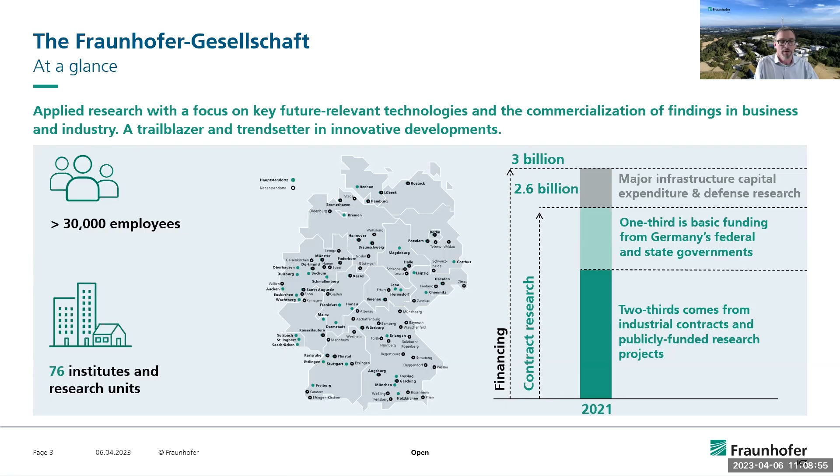As I said, focused on industry, we target lead markets, which also are identified together with our government. Those are plant, mechanical, and vehicle engineering, healthcare sectors, digital economy, construction industry, mobility sector, chemical industry, energy sector, food industry, and aerospace industry. And as well, what you can see here, the bluish or greenish dyed fields are the lead markets where we either contribute or we have the lead. So Fraunhofer ICT is leading the lead market, Fraunhofer Alliance for Chemical Industry.

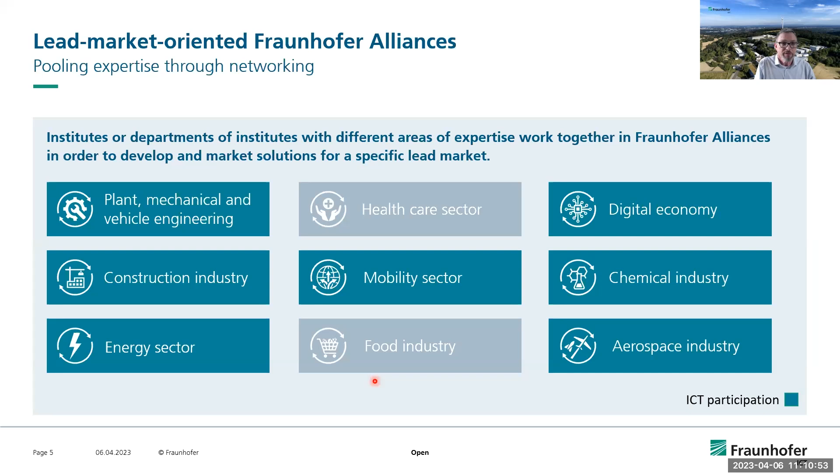Now, when we look into our institute, we have 4 core competences. One is chemical processes, non-fossil chemistry, electrochemistry, chemistry with hazard potential, etc. Polymer engineering, and within the group of polymer engineering, there's also the group for lightweight design and composite engineering. Then we have the energy and drivetrain system. And then we have a defense sector, which is also in explosives, safety and security. It also has to do a lot with filled and reinforced polymers, just with an energetic background and not a structural background. So these 4 core competences are being served with about 550 people, which are located at our institute.

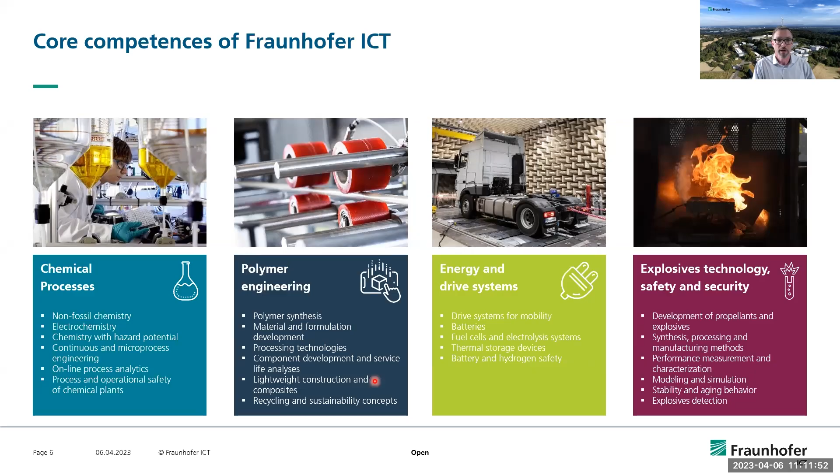And you see it's a pretty interdisciplinary approach where a lot of synergies can be derived. And a few I want to introduce in the beginning so that you can get a good imagination of who we are and what we are doing. Now, polymer engineering, I just picked 2 departments out of that family of departments that are fueling these core competencies, which are of relevance for today's presentation.

One is the Department of Polymer Engineering, where we look into material development and compounding, not from the perspective of synthesis, but from the perspective of modification, physical modification, filling, reinforcing, foaming technologies, a big subject at our institute, additive manufacturing, injection molding and compression molding, structural lightweighting, where I will talk a little bit more in depth today about wet compression molding, microwave and plasma technology, and obviously we have to get our material data cards filled. We do a lot of material characterization, and also when we do part development, failure analysis, etc.

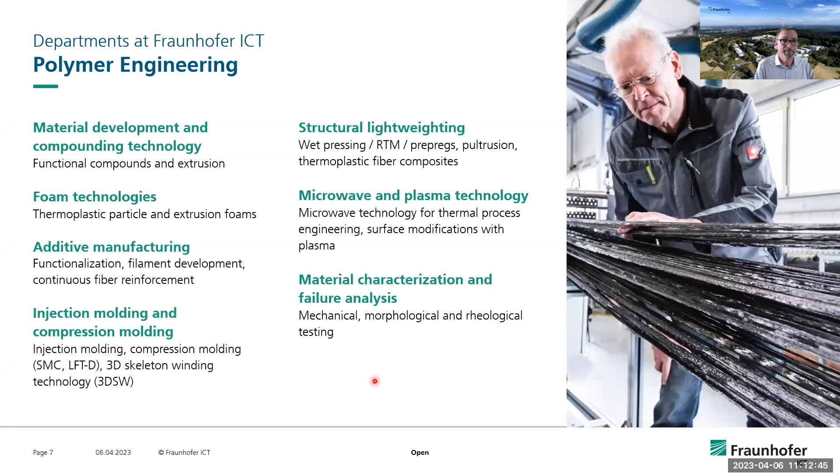A topic which I want to mention because we use it more and more in our projects is environmental aspects. Evaluation on sustainability and circularity assessment, but also recycling technologies, bio-based materials, bioeconomy, and subjects like environmental simulation and product qualification for our industrial partners once we develop prototypes, so that they can undergo artificial aging processes and exposure to environmental threats to qualify the product.

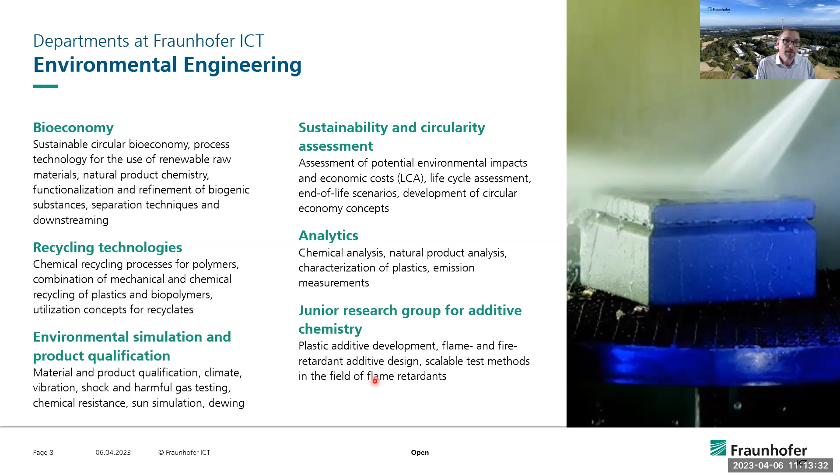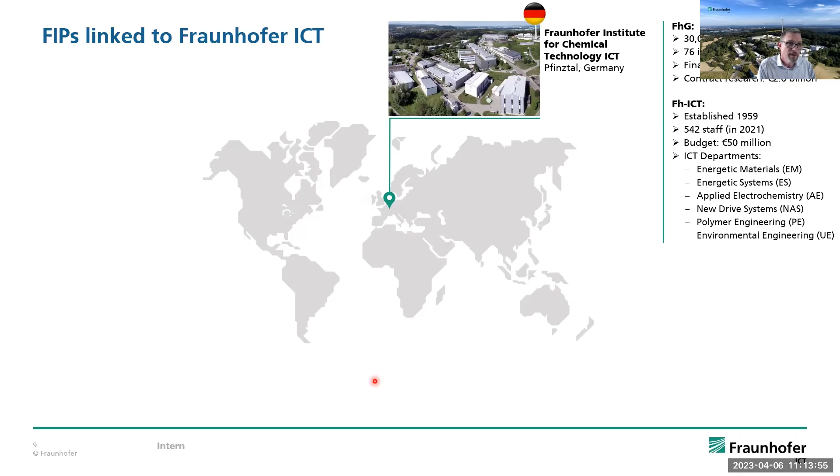Our institute, as I said, is one out of the 76 in Germany, and we are truly international. As mentioned in the introduction, I had the pleasure, together with my colleagues Andy Hrymak from Western Ontario in Canada and Youngbin Park from UNIST in Ulsan City, Korea, to collaborate in the field of composites with our competences and our main location here in Germany, having these 2, I would say, innovation platforms that have been established. Canada is the oldest one, with more than 10 years active now in the field of composite research, and UNIST more than 6 years now being active in the field of composite manufacturing.

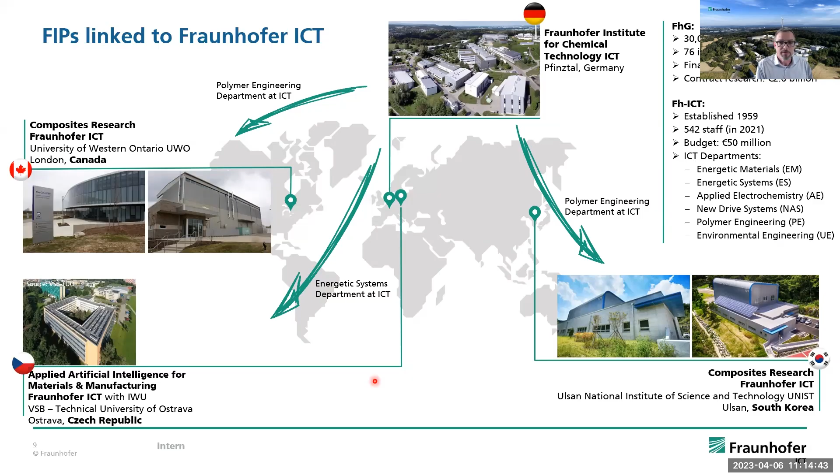And a pretty new one that we opened together with our partners in the Czech Republic, with a focus on applied artificial intelligence for materials and manufacturing, with the University of Ostrava in the Czech Republic. I mean, lightweighting and composites are already a contribution to sustainability. But especially at our institute, you see it in my background, you see the windmill sticking out here. I want to introduce a few highlights that we looked at.

So a quick introduction to this exception that we have here, having our own power plant. We are running not just a power plant, we also have energy storage devices, as you can see here. And energy storage devices are becoming increasingly important as a result of the German energy transition. They can compensate for natural fluctuations in solar and wind energy and thus convert the renewable energy source into a predictable generating station with uninterrupted supply. They can also make a decisive contribution to grid stability and frequency control and reduce the need to extend the grid.

In the framework of the projects that we are running, one is the Redox Wind project. A large-scale redox flow battery storage device has been developed, as you can see here on the right side of that slide, and connected directly to the intermediate DC circuit of that wind turbine here. And this unit, consisting of a generator and a battery storage device, has been constructed as a pilot unit at our institute in Pfinztal.

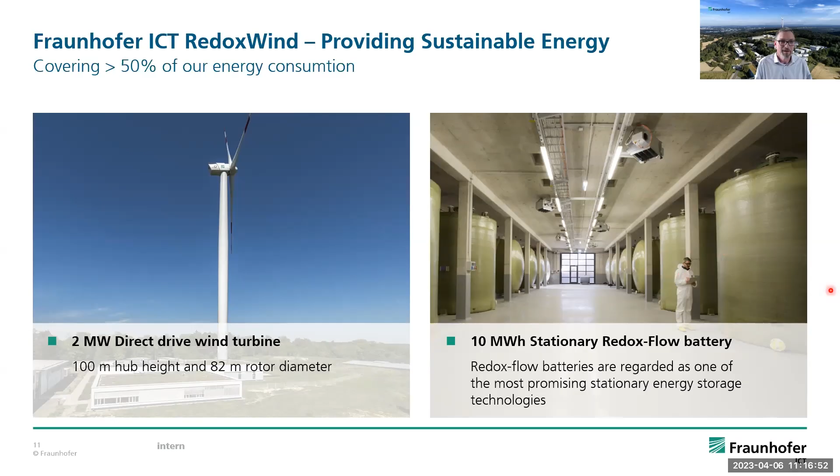We add this year 800 kilowatts of solar energy so that we are getting more and more independent of external energy supply, and basically are moving toward a CO2-neutral energy supply. And by the way, quite a bit of composites are already used in the wind turbine, and also, as you can see, in the battery storages.

From there, going to efficient, weight-efficient powertrain applications for sustainable mobility. 3 examples that I want to show to you based on projects that have been done in the past. One is a lightweight battery module, the conception and development of a lightweight traction battery system which, using innovative design methods and processes, serves as a prototype for the e-mobility of the future, with a direct tab cooling of the pouch battery cells, a high-performance thermal management system designed to allow for high charging and discharging rates without derating.

Or a lightweight traction motor. That was a really nice project. It's a motor which is directly cooled by a composite housing. It guides the water directly to the copper heat emitters, if you like. So the selected cooling concept significantly increased the continuous power density of the motor compared to the state of the art. So it's not just lightweighting, it's also functional integration or boosting of the power generated.

Then even for the combustion engine, here you see the aim of a funded project called LIMOD, where we focus on the development of a future internal combustion engine with significantly reduced mass, improved operation efficiency, thermal management, and reduced noise levels. That's obtained by combining additive manufacturing methods and large-size, lightweight, structural, and functionally integrated composite side covers. The engine concept is optimized for the combustion of non-fossil fuels, such as green hydrogen.

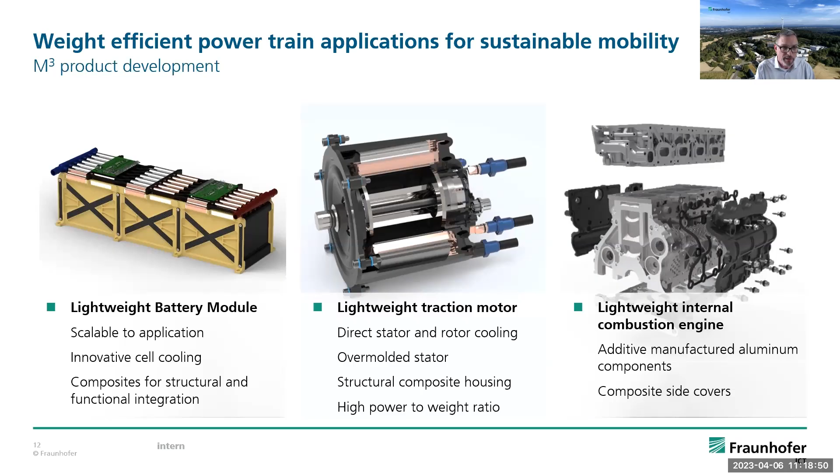Now coming to our main mission, lightweighting, reducing weight in a holistic way. So we spent quite a bit of thought on what is the definition of lightweighting. And as you can see, it's complex because it's not 2 words, it's quite a sentence. And it shows already the aspects that have to be considered if one wants to be successful. So lightweight design is a holistic implementation of a development strategy aiming at realizing the required function under given technical, economical, ecological, and social constraints through a system of minimum mass.

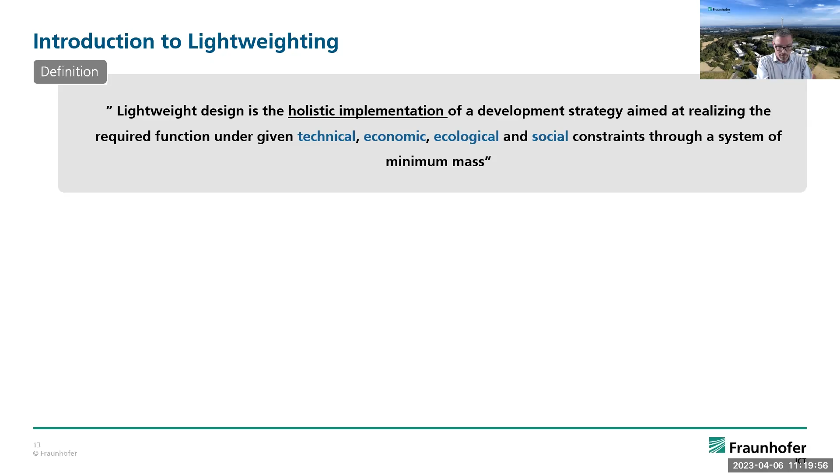We often, as engineers, dive right into the technological challenge, and that's our mission as scientists. And then the industry knocks on our shoulder and says, well, there are economic boundary conditions, and the range is being reduced significantly. And now we have societal, political constraints, mainly driven by ecological and also social constraints, that are influencing the toolset in the playground where we can develop our solution.

Therefore, we do need interdisciplinary approaches if we want to succeed. We have to develop a kind of system thinking and understanding before we select materials and processes. We have to understand the materials and processes that we are selecting. We have to learn how to predict them, and we have to learn how to manufacture and predict manufacturing in order to use the materials in an efficient way. Not just because of weight reduction, but also because of cost reduction and ecological impact reduction. And that embedded in a social and environmental boundary condition.

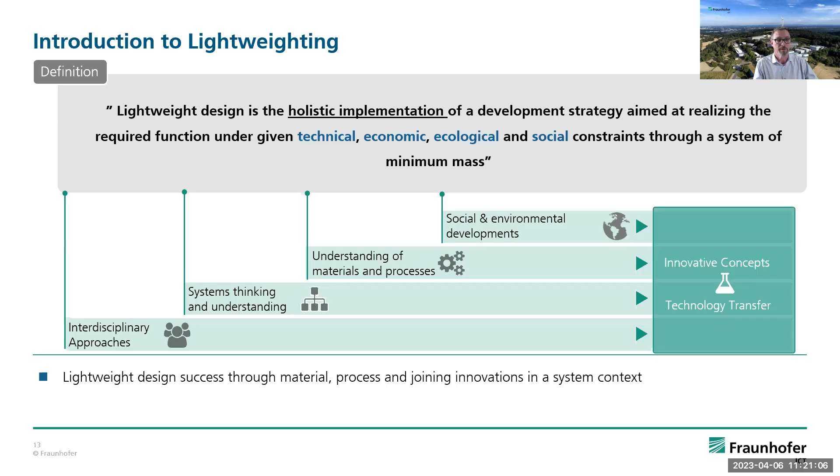That's our fertile ground where we have our M to the power of 3 approach embedded. Lightweight design success is always through the material, the manufacturing process, but also the joining innovations, because every system has different boundary conditions, as I said, and a lightweighting solution which is economically successful looks different in aerospace than in automotive. And we also have to think, how can we work collaboratively with other materials in order to get to a system solution, which can end up in a hybrid solution as well.

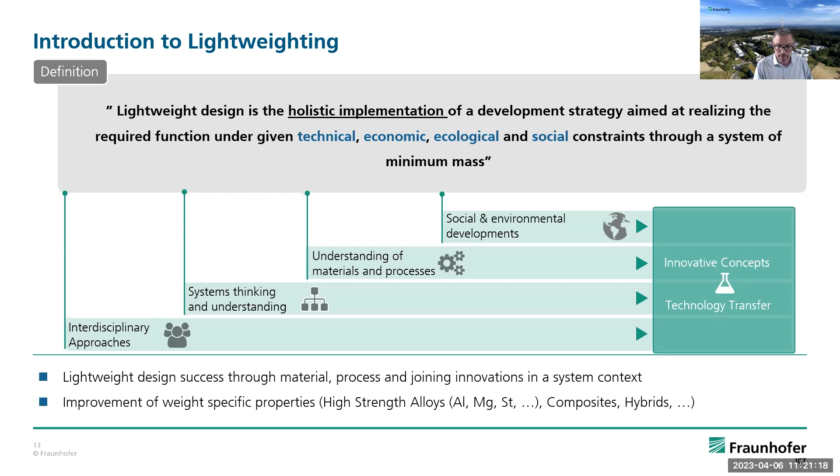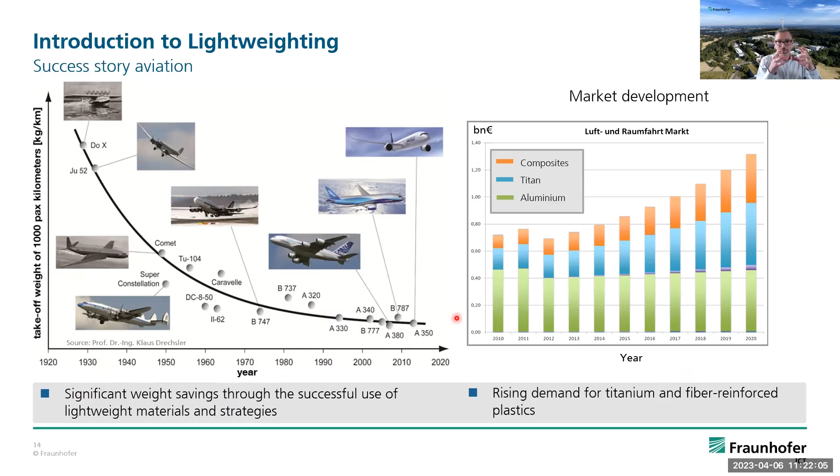When we look into different markets, we can name a huge success story in the aviation sector. What you see here is 100 years of aviation with different, very familiar airplanes, and the takeoff weight reduction that has been achieved over the past 100 years, by the selection of the most wonderful materials you can imagine, most expensive as well, but there's a business case for it which is different from that of automotive. So we cannot copy these solutions to automotive and think that we can be successful as well. We have to have this holistic understanding, which I want to talk about today in a bit more detail.

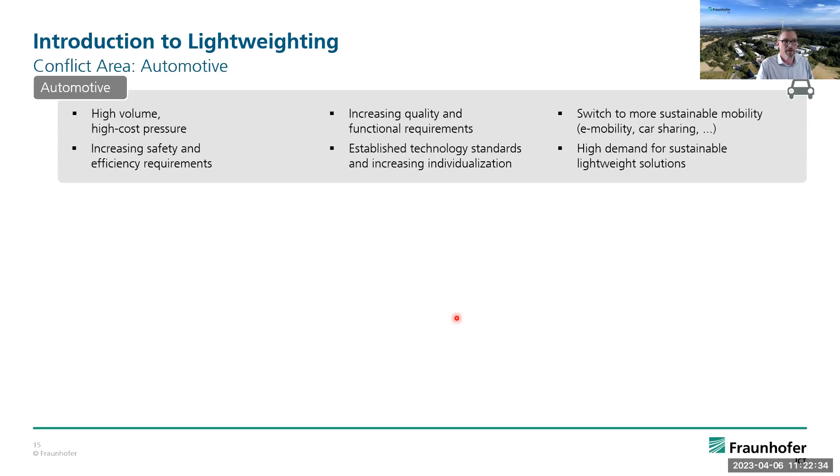When we change the scope and look into automotive, vehicle design is subject to a different field of tension. As I said, the business case is different. The vehicle is most of the time in the parking lot, whereas the airplane is most of the time in the air, earning money with the weight saving, right? We have high volume, high cost pressure, increased safety and efficiency requirements, increasing quality and functional requirements. We have more individualization boundary conditions, and we have to switch over to sustainable mobility. So we are in a transition right now.

And all of a sudden, with new drivetrains and new vehicle concepts, new materials can come into play in areas where they couldn't, because we don't have a combustion engine anymore. But we have a very heavy battery to carry. So from the regular combustion, that's the curve in automotive. It's not declining at all. It's still inclining. We could flatten the incline and be more efficient by innovative materials and material combinations, but we added more and more safety features, comfort, and functions to the vehicle, and all of a sudden, the big jump with the batteries that we have to accommodate. So yes, lightweighting plays a continuous role in automotive in order to be efficient, because the volume of automotive is much higher than that of airplanes.

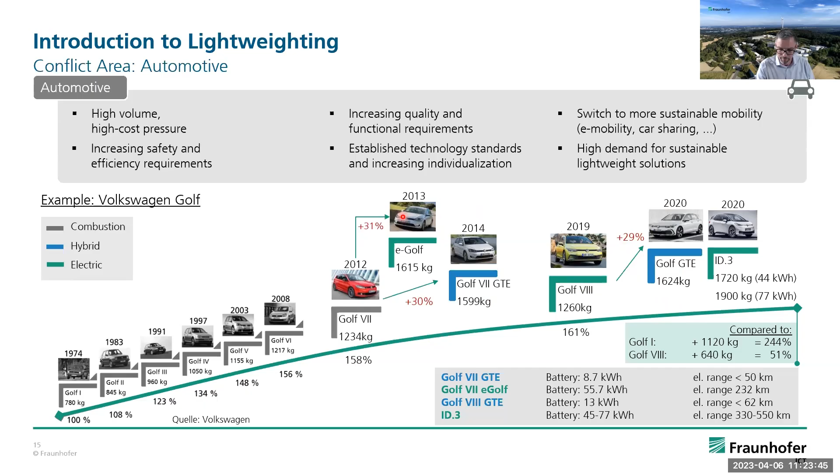Now, since we can't go with the same approach, we have to think about so many boundary conditions in terms of platform strategies, large volume production, etc. In most cases, it's a smart solution to come up with a multi-material design. So how do I bring the right material to the right place, so to say? In theory, wonderful. In reality, challenging, because we have higher complexity, we have the delta alpha challenge, as we call it, the different thermal expansion of the different materials. We have to join them. We have to maintain that marriage until the end of the product life. We have to ensure repair, maintenance, etc. And we have to make sure that we separate these different materials after their lifetime in order to be recycled appropriately.

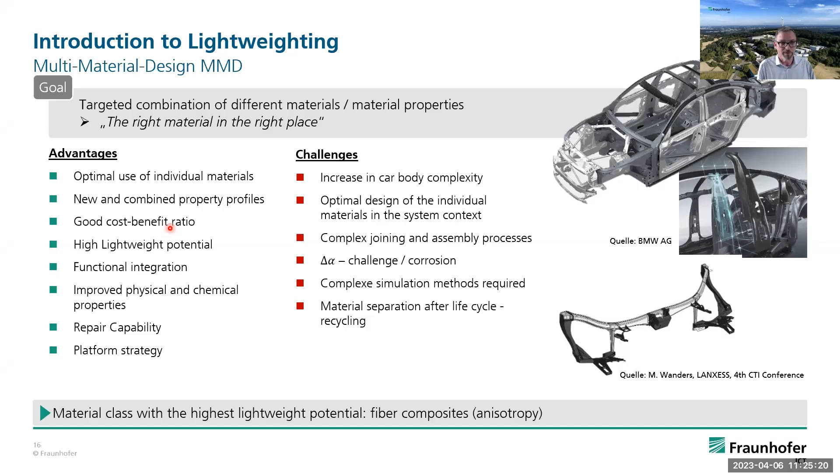But on the other side, we have a couple of advantages we want to take advantage of. Like you see here, I don't want to read those individually to you, but finding the sweet spot is always a challenge, requires the toolkit I'm talking about, and requires a common interdisciplinary approach. The material class with the highest potential for lightweighting, as we discussed prior to this talk today, is fiber composites, because they are still the youngest group, and they have an additional benefit, the anisotropy, because they can be designed already on the material level, and not just in the part design.

When we look into the efficiency of lightweighting, and that's a vehicle life cycle, you see that in the vehicle life cycle, 85% of the CO2 emissions are being generated during the use phase. So yes, it's worth spending a lot of effort on lightweighting and employing new materials. Just 0.1 is in

recycling. But in order to improve this ecological footprint, we have to take that out of the equation and then just look at material production, raw material supply, vehicle production, recycling. How can we decrease the gap when we do a life cycle analysis versus a circularity analysis, and see what we gain back after life cycle and what gap is still left, and how can we minimize that by employing appropriate materials, and also materials maybe in future that are more based on natural sources.

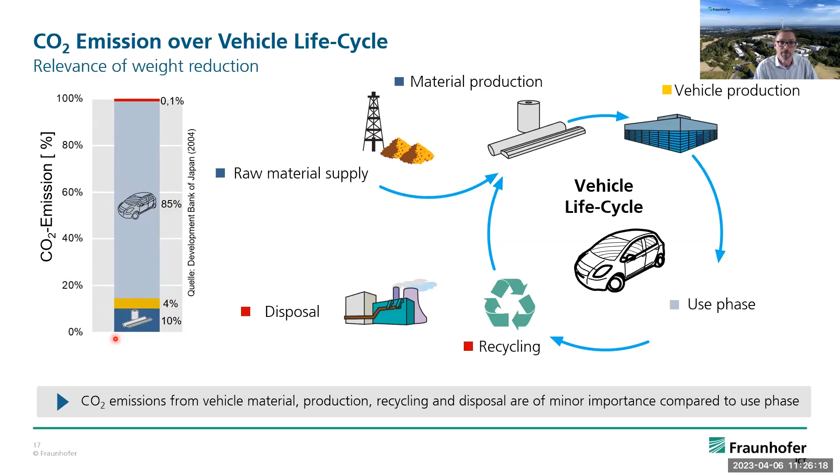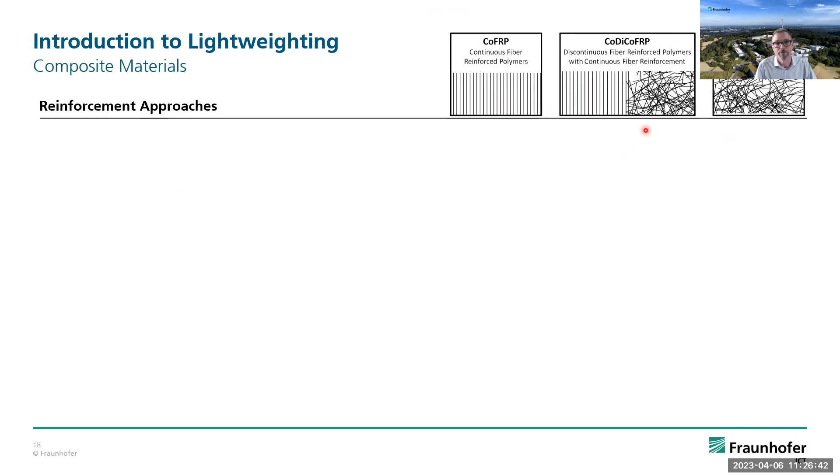Now, quickly, how do we distinguish the world in composites at our place? We talk about continuous and discontinuous fibers. That's our abbreviation here, CoFRP and DiCoFRP. And then we have the nice combination of both. So that's a co-molding of discontinuous fiber reinforced polymers to continuous. I apologize for the complexity of the slide, but that summarizes basically our world of thinking here.

What you see here is the continuous fibers. Here's the discontinuous fibers. These are structural applications. These are more functional lightweighting, totally different performance here, and also completely different process technologies because it's a flowable material. The completely different material behavior can be processed differently in much larger numbers, much more complex compared to the continuous fiber reinforced materials. So it obviously makes sense to think also about the combination of both in an efficient way, where we have the best of both worlds, somehow combining structural performance and functional integration.

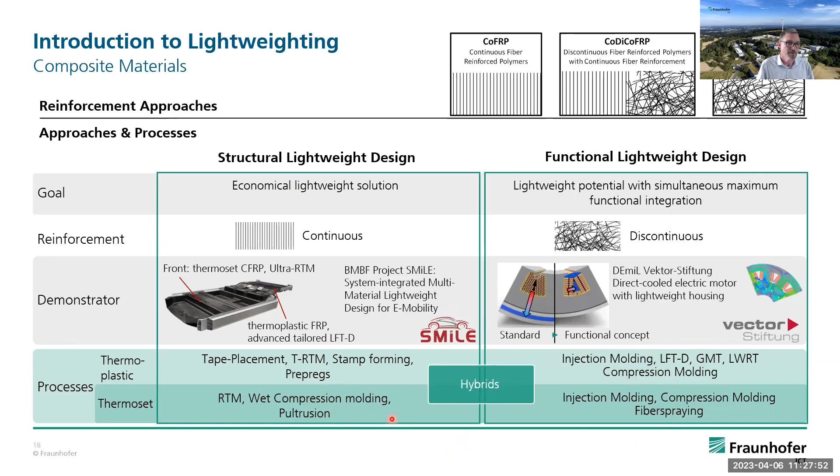The greenish fields distinguish between thermoplastics and thermosets, and what you see here, and that's a summary basically of what we offer in our area, is medium to large scale automated technologies for composite manufacturing, with a focus on medium to large scale, as I mentioned. So that's our technology portfolio. Talking about the approach now.

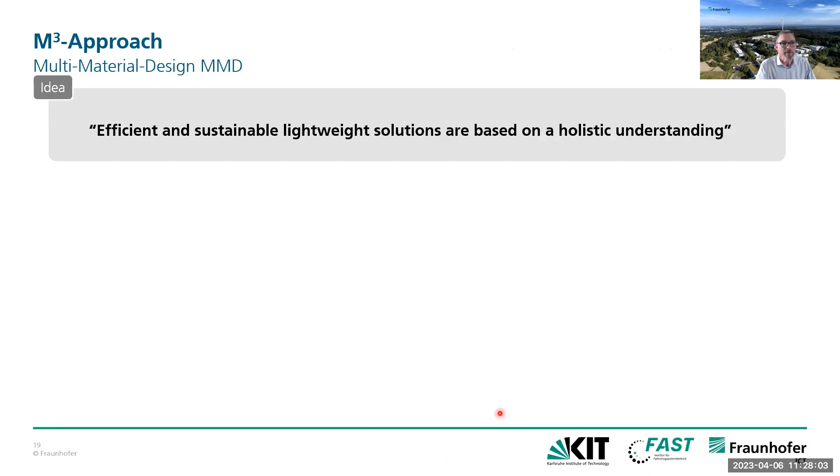And obviously in automotive, we cannot do quality assurance part by part. We have to quality assure the process. All of a sudden, the process gets expensive because it's automated. But it's negligible in terms of the number of parts you will produce with this technology, compared to aerospace, where you have to consider manufacturing technology costs much more intensively because it can't be amortized the same way. So you see, I'm just highlighting some of these constraints that we have to think about before we start selecting an appropriate material for an appropriate market and an appropriate application.

And then we look into how many parts, what are the suitable manufacturing technologies, what materials can come into play. Here in automotive, more the commodity materials; in aerospace, more the high performance materials. And how can we produce efficiently, and how can we secure that with the understanding of the materials, simulation methods, predicting the manufacturability and the manufacturing influence on the material, whether that material is suitable in that shape to fulfill that function. And then we get to a lightweight solution which is economically, ecologically, and technically feasible and socially accepted.

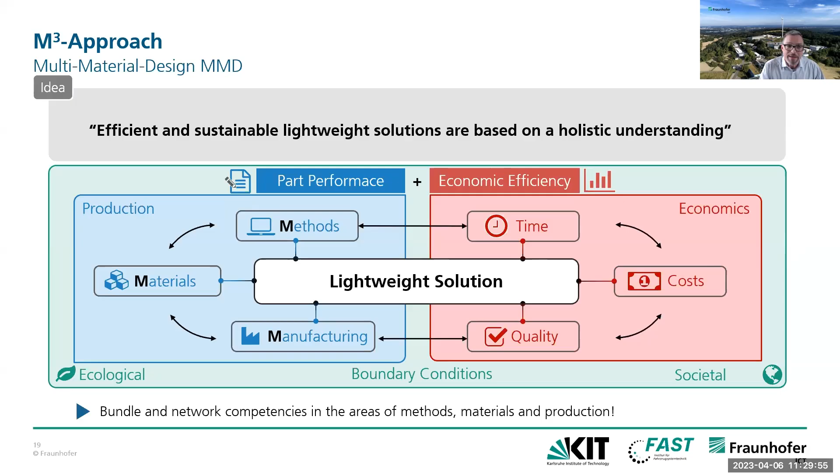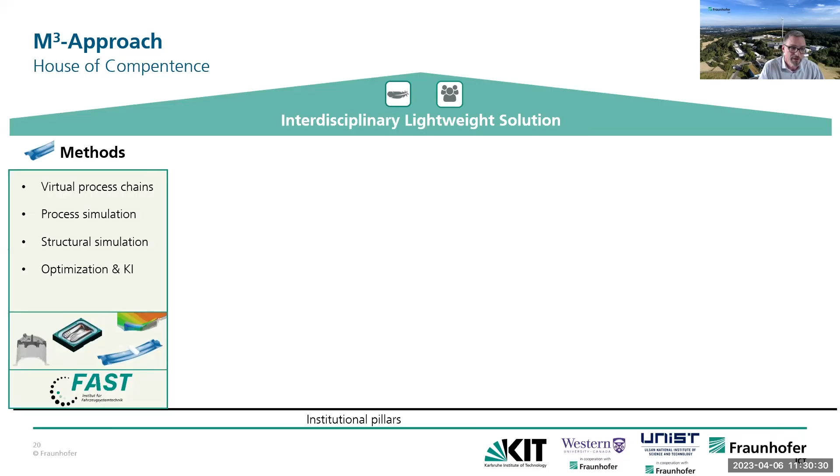We can't do that as one institute. We have our partners. So we formed a house of competence in Karlsruhe, where the superset goal of the interdisciplinary lightweight solution is being supported by the development of methods, development of virtual process chains for different types of materials, for different process technologies, process simulation, structural simulation, and then also optimization of products and design and artificial intelligence supported manufacturing.

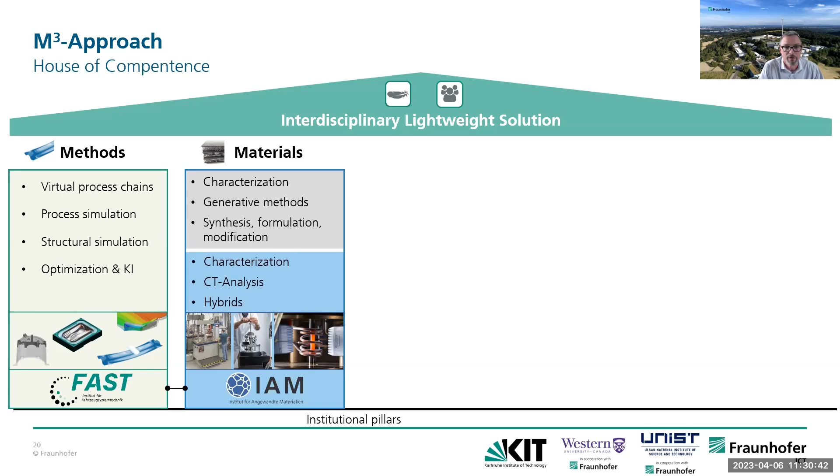Then we have the materials, where we need to fill our material data cards, where we do the characterization, the understanding of the morphologies influenced by the processing as well, and translate that into suitable manufacturing technologies, or consider that at least when we select suitable processing technologies. And then basically through our partners, we do projects at the different innovation platforms or with our spin-off companies that are also part of the transfer.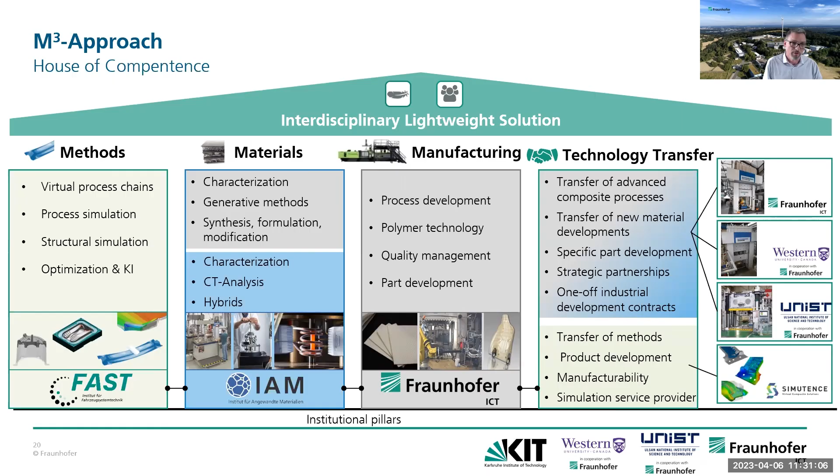Talking about the M³ approach, methods, material, and manufacturing, I brought an example of a past project that we conducted a couple of years ago already, the so-called SMILE project, where the major focus is the development of concepts and design for an innovative mixed material body for an electric vehicle that was without steel, so that we don't have electrophoretic painting, which is an advantage because we don't have the painting process and therefore don't have to use the high performance resins that we have to use when we have to undergo this.

The development of a virtual process chain for component and total cost optimization, the validation of the structural integrity and the crash requirements at component level. We are focusing on two parts. One is the floor, thermoset with ultra resin transfer molding. It's a pressure controlled process, and the other one is thermoplastic tapes overmolded by LFT. That's a rear body structure that's more the crash element, the energy uptaking, and the passenger cell more stiff. Stiffness optimized is a thermoset.

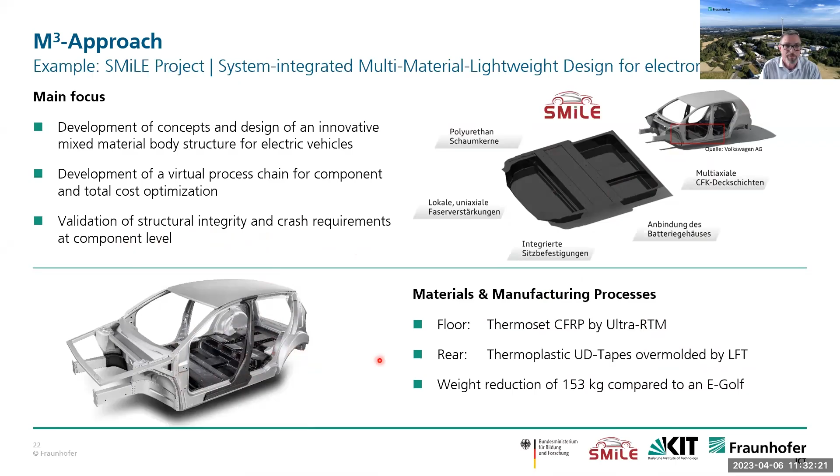So the advantages through a holistic approach and a continuous CAE chain is to consider manufacturing effects and their influence on structural behavior, to verify the manufacturability, and to have iterative optimization at the simulation level without having a lot of testing and molds development, because these kind of molds are expensive. So we want to have a virtual design and optimization of a product and a process up front, which accelerates the part development and results in reduced design loops.

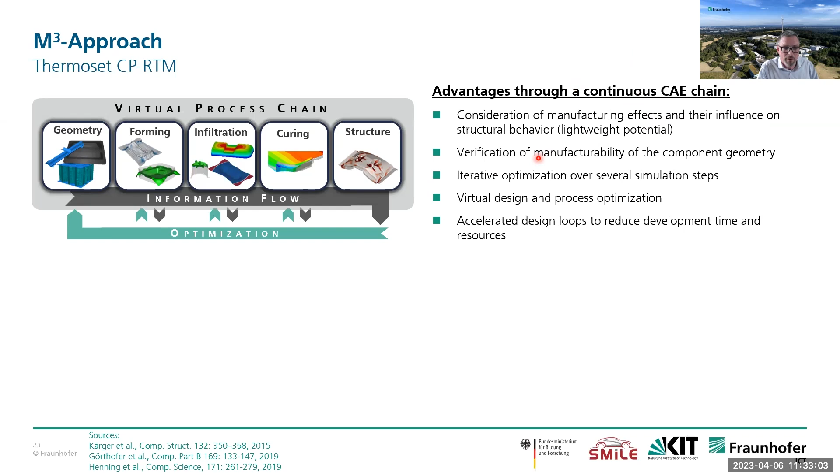Now, having just a focus please on the second part, that's the mold filling displayed in this video. In order to get there, we have to understand all these different steps, the forming prediction, the local fiber content, and also fiber orientation, permeability changes, and then the resin that's tested here. That's why I say material, method, and production. We need to validate that so that we can use that for further part development afterwards. You see here a couple of publications below.

A lot of this work is coordinated and done by my colleague Professor Kärger, who together with me is running the research institute at FAST for lightweighting. And we are also working with our material characterization folks. You see this plate rheometer is a special development because these highly reactive resins have to be mixed and injected immediately, because when you do it in a conventional way, it's already cured before you start measuring. So we have to adapt methods to get real data for what's happening in the process during the manufacturing, which is a couple of seconds only.

And then when we have the mold filling, which is pretty accurate, we have different wall thickness, we have sandwich structures in between. Then we do the cure simulation, and from the curing we derive stresses and also warpage that help us to control part tolerances.

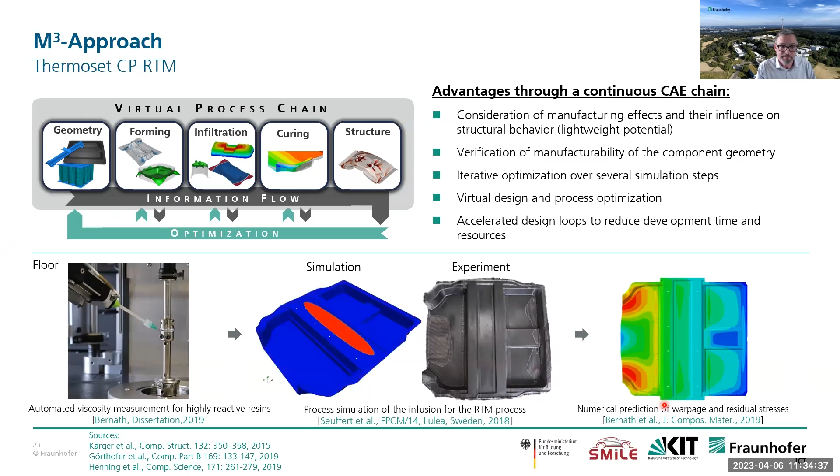Now the back structure you see here is a tape placement, or organo sheet if you like, thermoplastic, hot, then molded, as you can see here, with a segmented mold. So it's like ironing a textile from the top to the bottom, from the inside to the outside, in order to avoid wrinkles. So by the simulation, we can predict which area has to be draped first and which last, in order to avoid wrinkling and get an appropriate

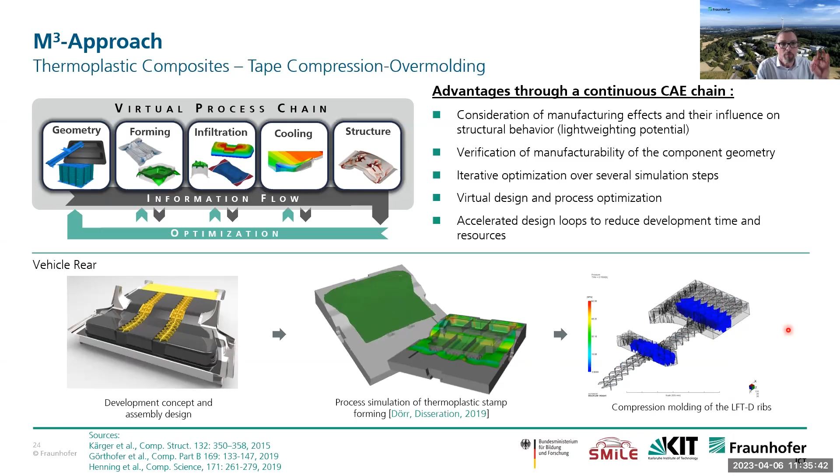wrinkle-free preform. And then this, together with the aluminum longitudinal carriers, crash carriers, is inserted in the mold, and then it's overmolded by a discontinuous fiber reinforced thermoplastic, which also joins the material at the same time to this part. Two examples where this holistic M³ approach has been applied, and I want to go a little bit more into detail with wet compression molding.

I would like to illuminate this M to the power of 3 approach by using a research collaboration between the KIT in Karlsruhe and the University of Stuttgart, the Institute for Airplane Design, into the enabling of the wet compression molding technology. You see here the video. It's a transparent mold so that we can see this greenish resin on top of the fabric that is being spread, impregnating and forming at the same time.

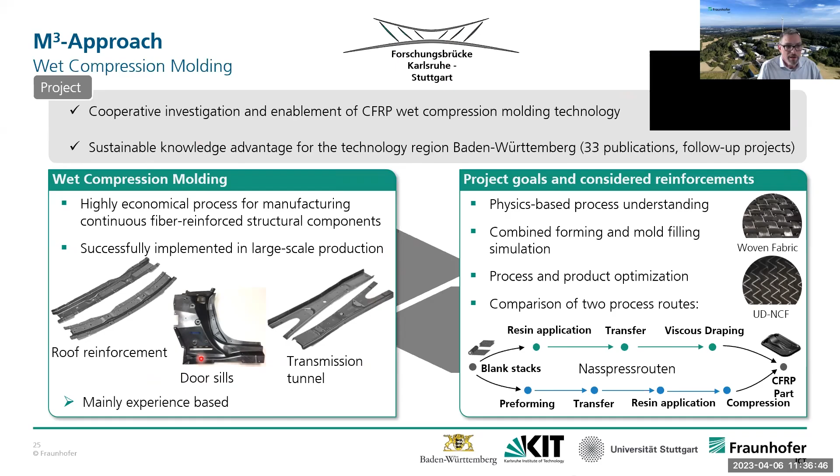We want to compare two routes. The green one is being investigated by our institute, the blue one by the Institute of Airplane Design. They're using preforms. We want to do that in a direct process, so while forming, we are impregnating to save one step and to see whether we get to a suitable robust process by investigating this. Here you see some parts on the left-hand side that are in industrial application, the BMW 7 series right now.

Let me introduce the process steps for now. So there are 5 process steps. One is the cutting and stacking of the individual textile layers. Then we have the resin application on the top. Then we transfer the textile layer stack with the resin into the mold. We have a kind of a viscous draping. We have a curing. We have a demolding.

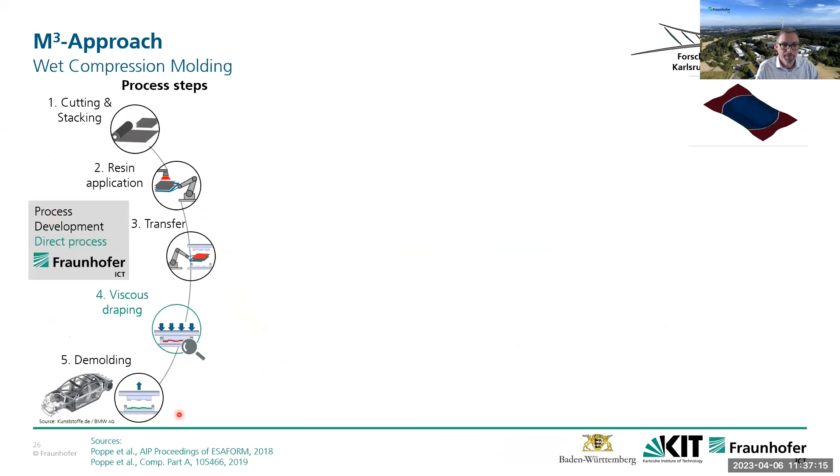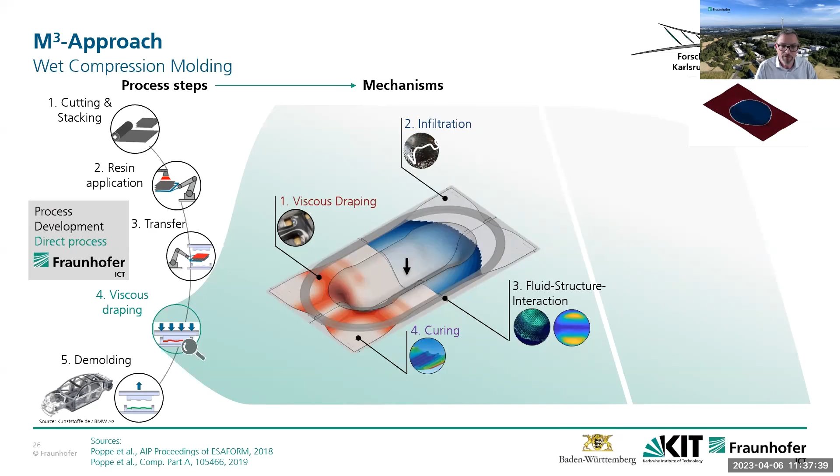Okay, it's working. So the main physical mechanisms during forming are, as you can see, viscous draping, infiltration, fluid structure interaction, and curing. And that's not happening all at the same time. The interaction is different during the closing of the mold. So there are process phases, which are highlighted here on the far right.

First part is dominated by drape mechanism: membrane, bending, contact, compaction. Then towards the end of the forming process, the relevant fluid pressure occurs locally. This is critical for fluid structure interaction, so we can have a fiber displacement by having this resin being squeezed out. And the last 5% approximately are characterized by compaction and high fluid pressure. Forming is largely completed at that point.

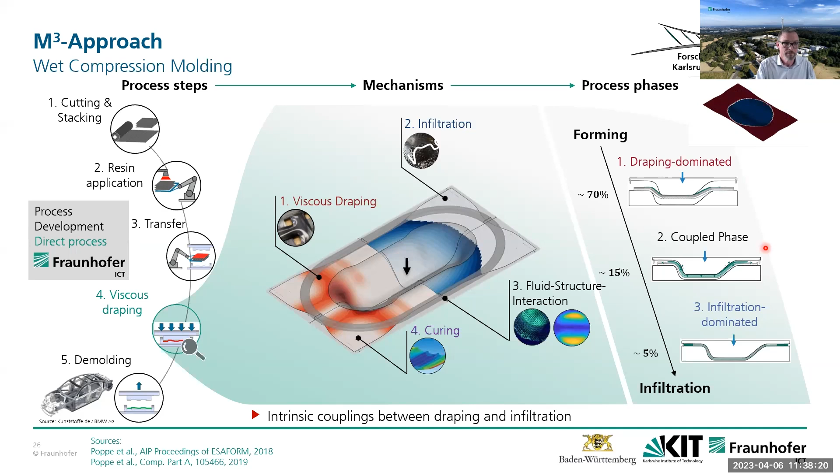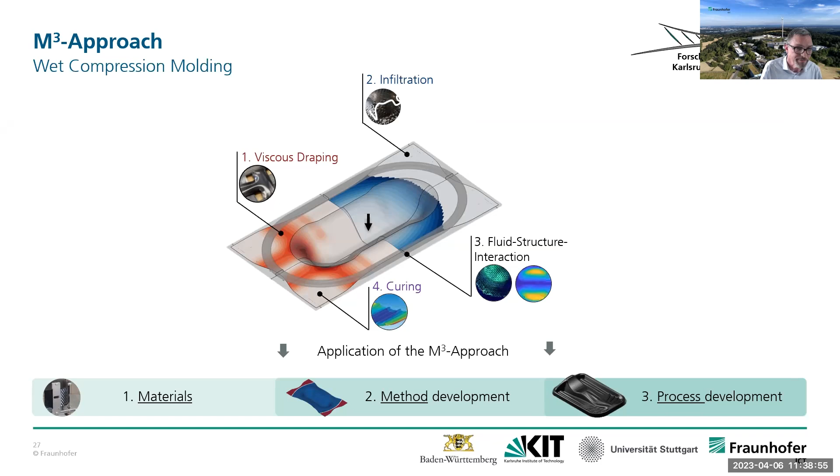How can we use this M to the power of 3 approach to systematically investigate such a complex interaction? First, we must characterize the material on a coupon level to understand and parameterize the mechanisms. Second, we need to derive simulation approaches describing this behavior and feed them with the characterized parameters. Third, derived from the material behavior, we can develop the process and understand interactions and limitations, leading to a geometry which is moldable without defects. So these 3 areas we'll go through. First, the materials.

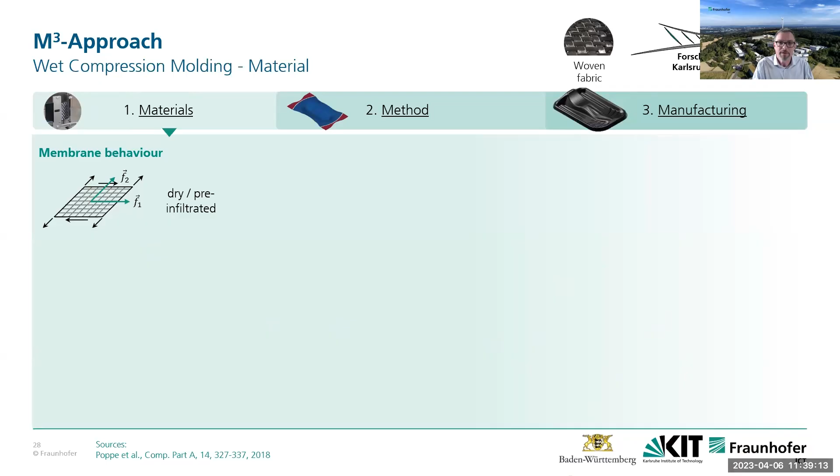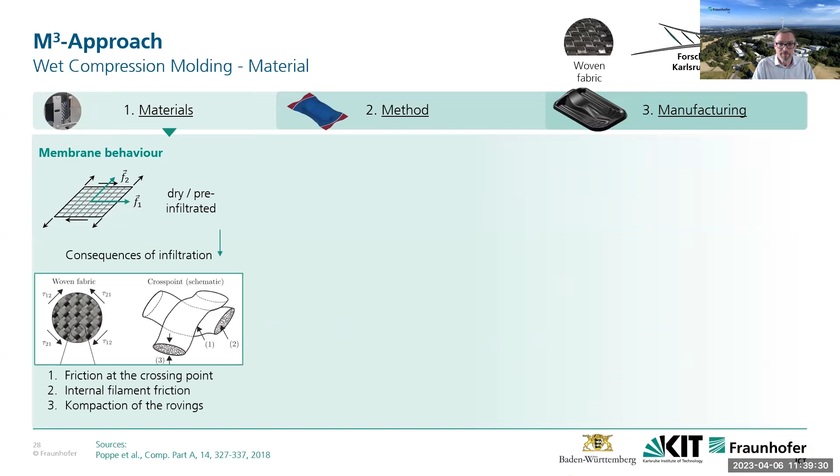What you can see here: step 1 of this approach, material characterization. So material behavior of dry and infiltrated reinforcement is crucial to predict shaping in the mold. Relevant deformation mechanisms: membrane, shear, bending, contact and compaction behavior. Contact here is omitted because of timing and space. Examples here show the membrane behavior.

So infiltration determines the shear behavior influenced by the friction between and within the contact points of a fabric, as illustrated here on the left side. The consequences of infiltration are that friction changes, both at the crossing point and within the rovings. In addition, the compaction behavior is changed, and that influences the locking angle.

The new test rig is shown here. So you see here the fluid basin. So that's a test rig that has been developed. We call it the IBET, the Infiltrated Bias Extension Test, where the shear deformation was measured in a fluid basin at complete wetting. In that case, the camera from the top is measuring the current shear angle in the center of the specimen. Obviously, we have the 3 zones: no shear, half shear, full shear in the center of this bias extension test.

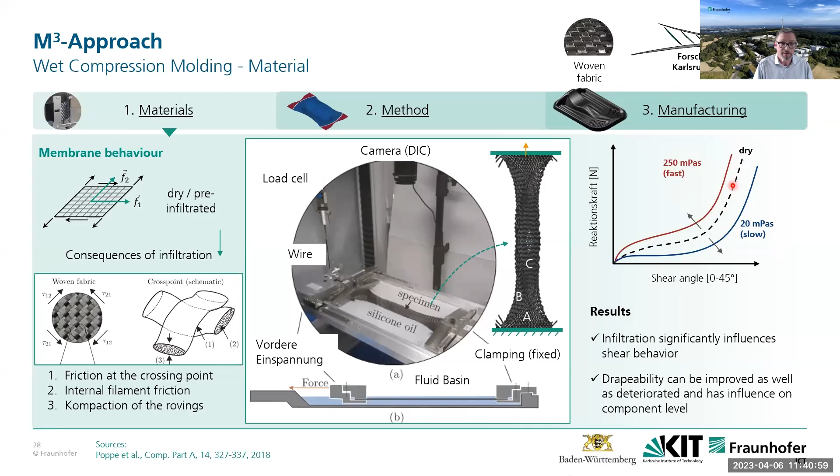And finally, the drape behavior, and that's what you can see here nicely, can be improved as well as be deteriorated compared to a dry fabric, which is very important for the process and the mold design. So it has to do obviously a lot with the viscosity and the reactivity of the resin, which is the viscosity over time.

Another important material aspect is interaction between permeability and compaction. Permeability is determined via a one-dimensional flow according to Darcy's law. A gap is approached, we have a constant volume flow which is set, and then we measure the pressure difference stationary. In-plane is self-measured, even for sheared samples we need to measure and determine that, and through-thickness, that's something we did externally with Fraunhofer colleagues in Augsburg.

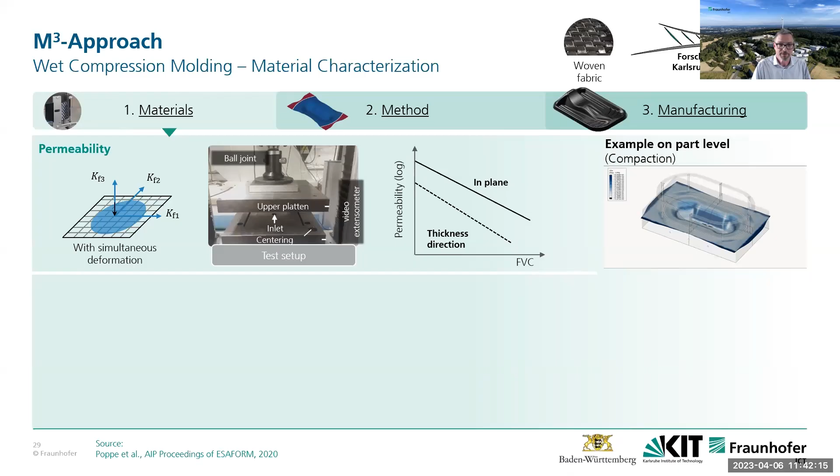The process simulation uses a fiber parallel reference system to describe the anisotropic material behavior, Lagrangian description method, and the description of the permeability taking into account the current fiber orientation makes it possible to intrinsically capture the influence of shear. This is a great advantage compared to an Eulerian description. In fluid mechanics, due to the spatial reference system, a complex conversion must always be made to account for shear and for fiber orientation.

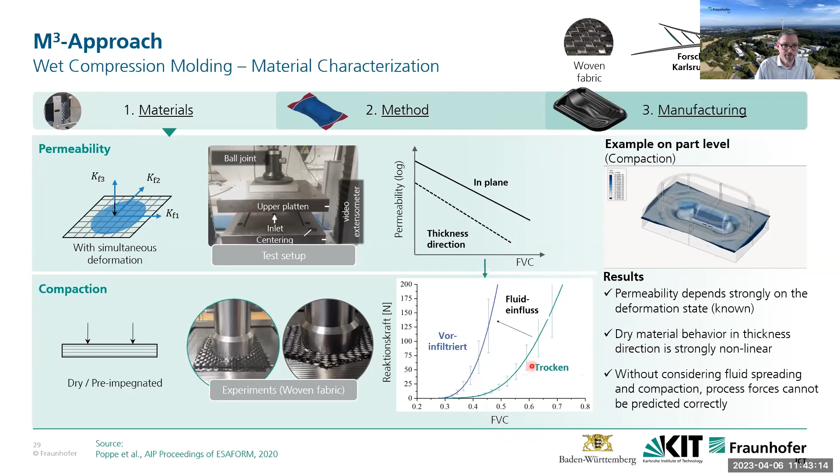All right, compaction, another material characterization. We observe a nonlinear dry material behavior, and with additional infiltration, we see that it leads to an increased reaction force, since the incompressible fluid now must be squeezed out through the material, and therefore we have a changing porosity, a changing permeability at the same time, and we have to map this interaction between deformation and permeability, which we consider crucial for robust process simulation, and obviously if you want to predict press forces or compression forces. So we see quite a bit of dependency, fiber volume content over the reaction force depending on dry or pre-impregnated textiles.

Now here the process is being illustrated. That's the second step, now the method development, based on this material behavior that we just investigated. So we developed a drape test rig for the investigation of material behavior, for an in-depth process understanding and for validation of models.

Then we looked into the development of a corresponding simulation model for a transparent double dome test rig. The modeling of the tool areas is relevant for forming and modeling the material behavior. The discretization of the complex problems takes place by means of finite elements with special properties, followed by the solution of balance and constitutive equations in the discrete elements.

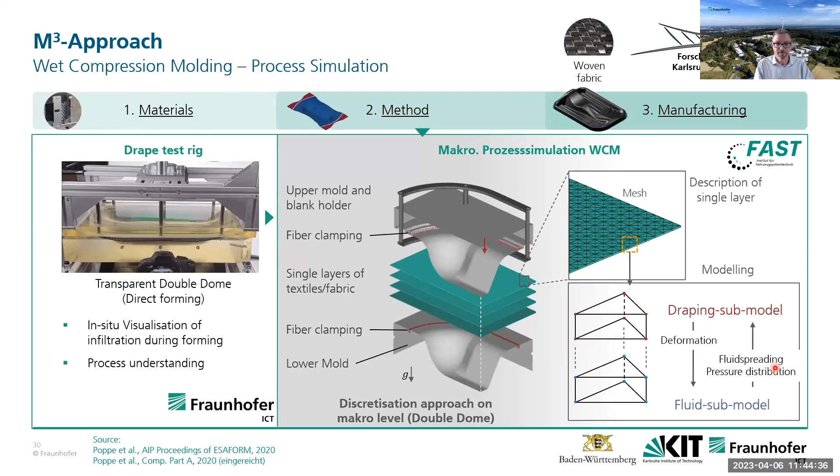In the right picture, the development and coupling of special finite elements, drape and fluid submodel, to represent the material behavior previously observed in the experiment. Solutions of the submodels are coupled and simultaneous, thus a direct interaction is captured. This method considers material behavior under process boundary conditions with single independent layers, since slippage during forming has been considered as important.

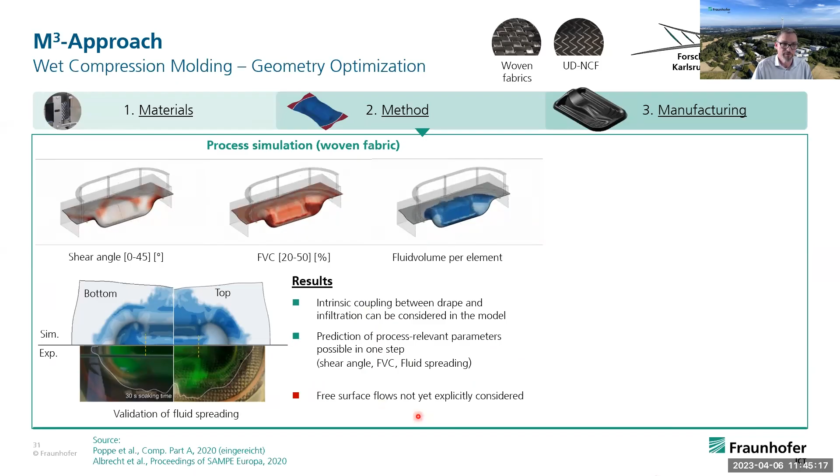Click. Oh, it's gone. Yeah.

Use of the methods that we developed here for the design and the structural prediction of the demonstrator geometry is the next step. So we want to investigate and optimize the geometric features. We want to investigate whether these geometries are manufacturable or not, and optimize them, determine maximum acceptable geometry, fiber orientations, and load path.

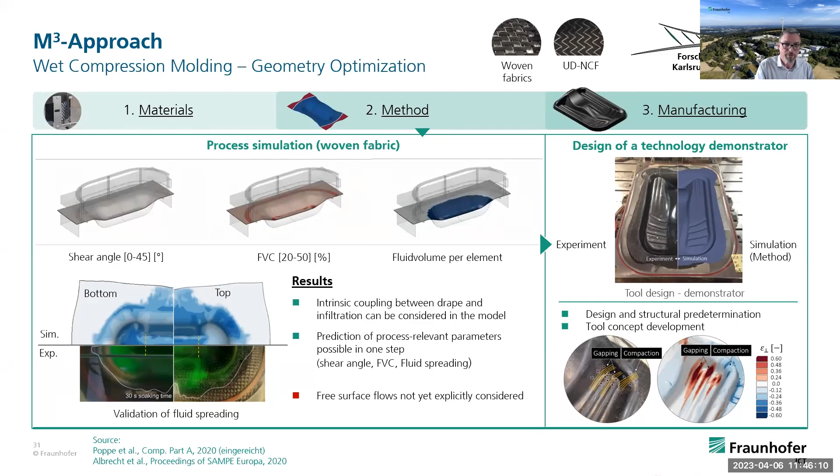So the virtual process and mold design, which basically go hand in hand, secure the tool design in the end and the prediction of the critical points. We can also derive from there the global blank holder, or whether we can use a monolithic stamp, or we have to derive from it a multi-core stamp.

Finally, the third step of the M to the power of 3 approach is to utilize the previous findings to design an efficient process and understand and predict the wet compression molding technology, shown on a complex demonstrator. And that is the sled. What you can see here is a carbon sled with multiple layers of textile reinforcement, woven fabric, and non-crimp fabric.

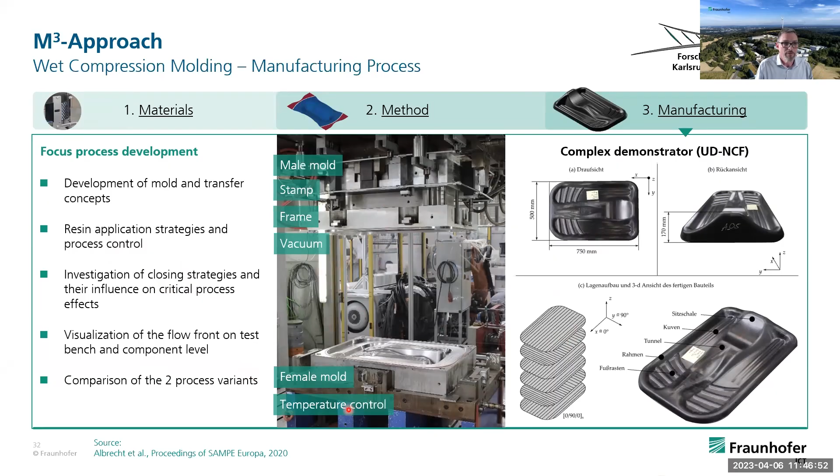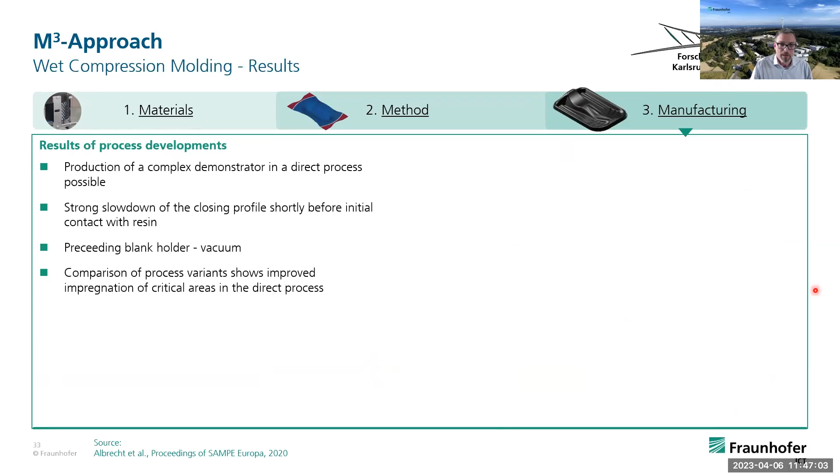And we developed, based on those results, the mold and the transfer concept, the resin application strategy and the process control, and we investigated the closing strategies and their influence on the critical process. And then basically compared the two variants, one direct form and the second one with a preform. And that's what you find here. Let's complete that picture before I talk about it.

So the results of the process development and the comparison of the two process routes is what you see here. A complex component, as you can see, can be manufactured even better in the direct process. So we don't see any entrapments or any dry spots here, as the complex box corners are infiltrated at an early stage before they are being compressed.

So when the permeability is higher, it's rather better to have them impregnated properly, then squeezed out, rather than to have a preform where the permeability is not given anymore, and we have too high fiber loadings in those areas that prevent impregnation.

So it was vividly demonstrated how a complex process could be systematically investigated, understood, and successfully transferred to manufacture a complex demonstrator using this M to the power of 3 approach. The advantages of the mutual interactions of mechanisms could be demonstrated here and validated, also with some literature comparisons.

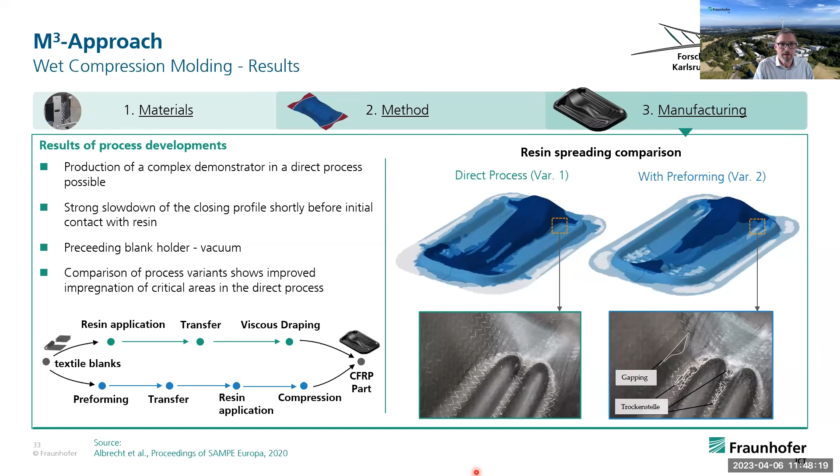To end that talk, or to finalize it, I want to quickly speak about some trends. Just a few short words: what we are facing right now in our daily work with composites is ecological and societal pressure. To a large extent, we have in Europe the European Green Deal. We have Biden, who just a week ago stated that the US goal is to replace 90% of plastics with biomaterials, whatever that means in detail.

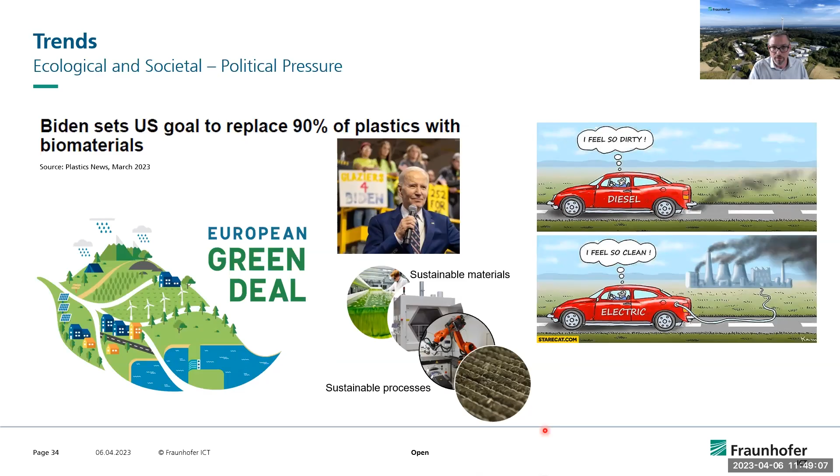It is a big announcement, and it urges us in the lightweighting and composite industry to look into the materials we are using. And I guess fibers based on natural resources is one thing, and a lot of research has been spent on that. But also on the resin side, there's still a long way to go, and there are materials to be preferred over others. And yes, this is just a glance. It's just 2 slides.

Using renewable energy sources always leads to a reduction of the environmental footprint, but especially for the high-performance materials, the replacement of fossil-based with bio-based chemicals like aniline is under investigation. However, in contrast to the carbon fibers, lots of components contribute to the global warming potential. The reduction potential has certain limitations. So we have to use recycled material and bio-based feedstock.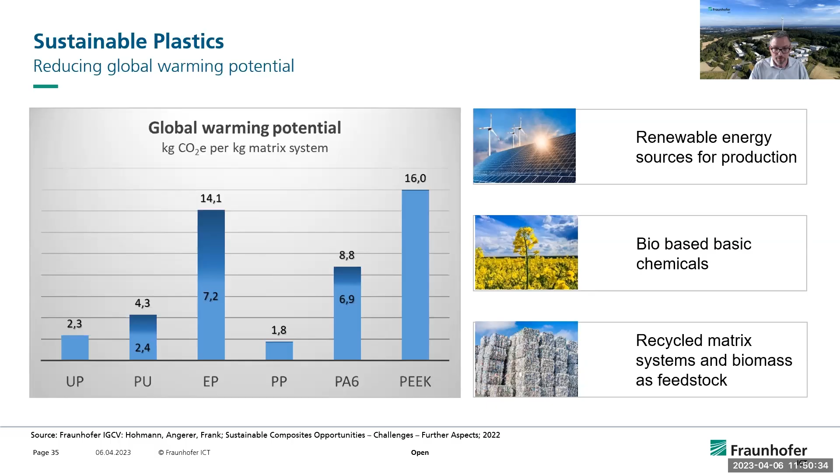And just to look into 2 materials that we had a closer look at, polypropylene and polyurethane, since they are quite established and often used, especially in the commodity field. It's heavily depending on the feedstock. So polypropylene you can derive from a natural source like wheat or sugarcane, and it's completely different in terms of their global warming potential.

However, when we then, beside this, use recycled PP, we can significantly save up to 80% global warming potential, but we have to really utilize all the potentials in order to derive chemical building blocks from natural sources and return them into the loop, using them in a circular manner to get to that high savings.

The fluctuation is somewhat higher for polyurethanes, because polyurethanes consist of two polymer components, polyols and isocyanates. For both, bio-based versions are already commercially available. And also recycled polyols are under investigation. So depending on the combination of these components, the reduction potential can be up to 90%.

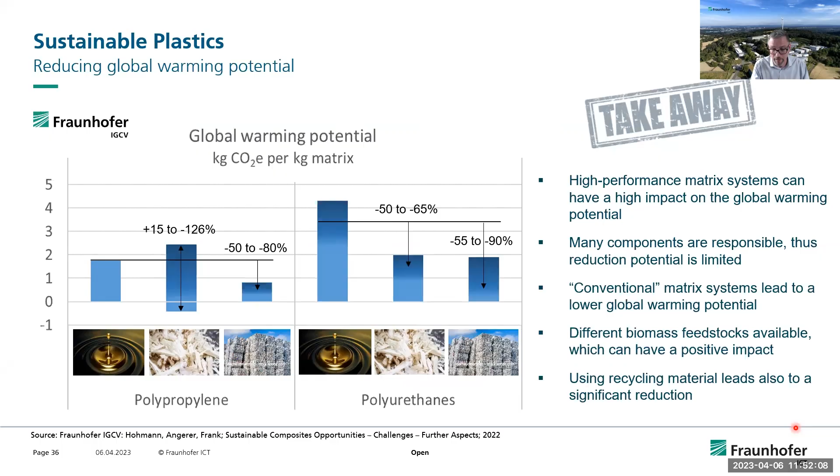In summary, what's the takeaway for these two systems? Wheat is best for polypropylene, sugarcane worse. So even these little things can make a lot of difference. And we have to use recycled materials and bio-based feedstock in the future. It's very interesting for polypropylene and polyurethane as mass polymers also being used in the composite industry. All right, I guess my time is over.

Finalizing with just one slide, and I jump over the others, is basically a cluster that we founded, the Fraunhofer Cluster for Circular Plastics Economy, where 6 Fraunhofer institutes are commonly working in 3 divisions, materials, systems, and business, which are divided in 6 research departments in the field of how to get from a linear to a circular plastics economy by starting with a suitable product design.

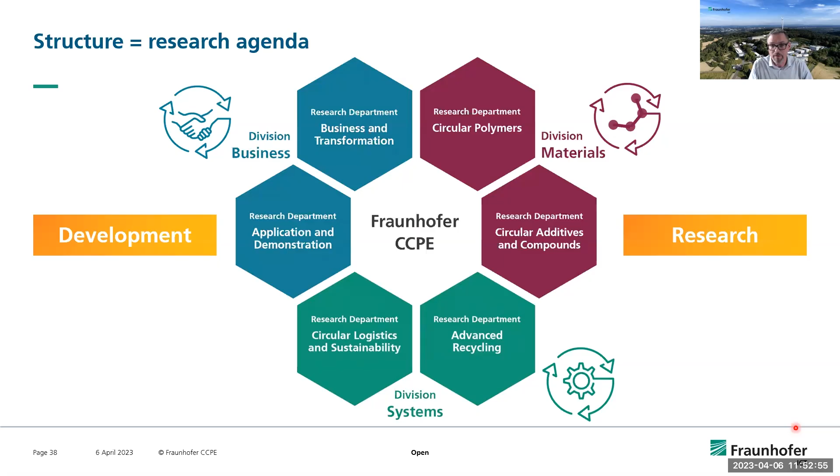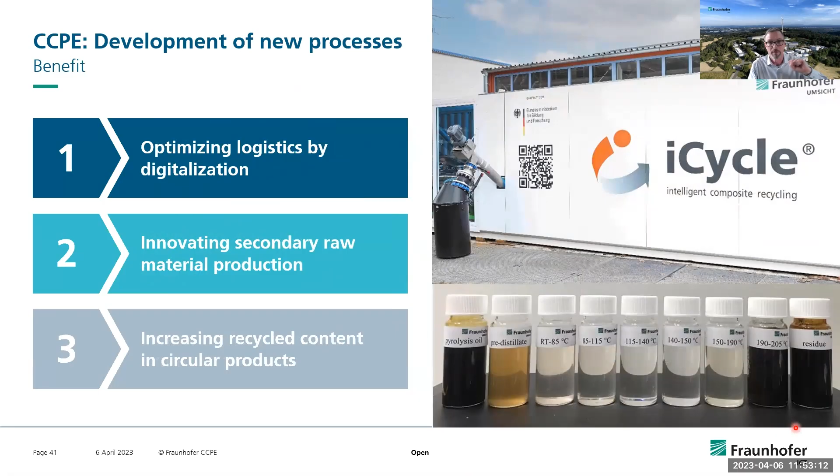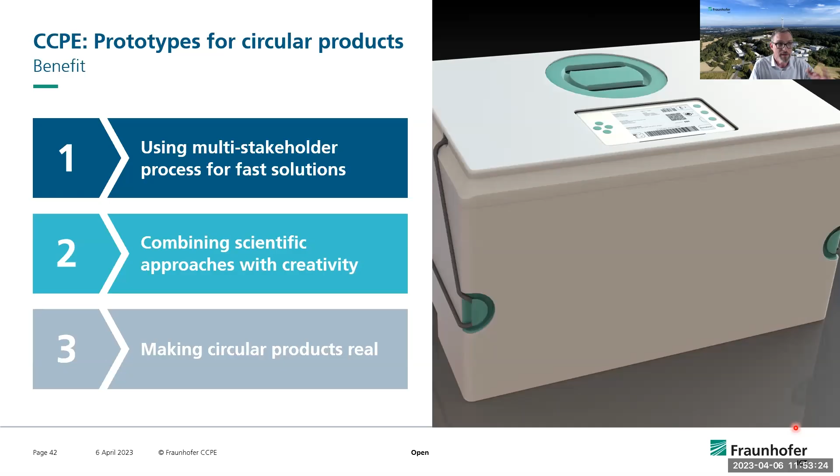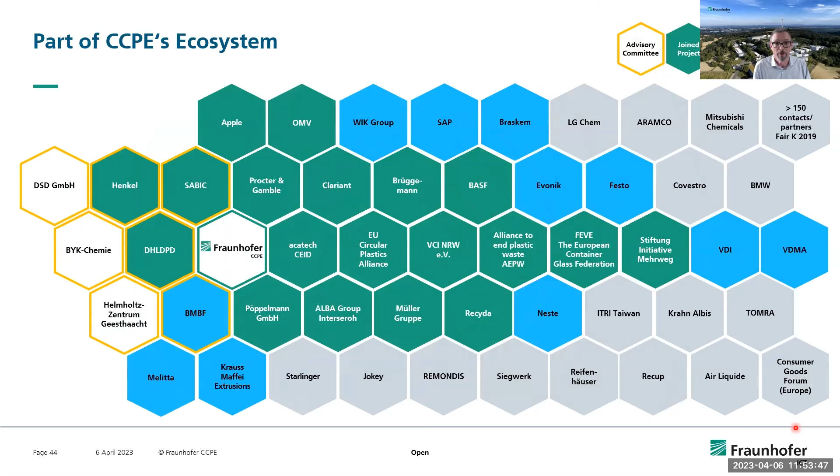And what I wanted to point out is to develop this linear into a circular economy, you need a lot of players, and Fraunhofer has, as you can see here, a lot of partners working along that value chain to work on that, I would say, topic of the next years, which is also very relevant for us in the field of lightweighting and composites. And therefore, there are a lot of new networks being founded, which I want to invite you to have a look at or to participate in.